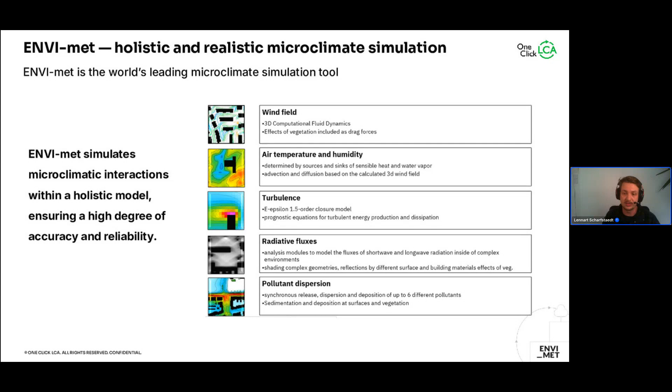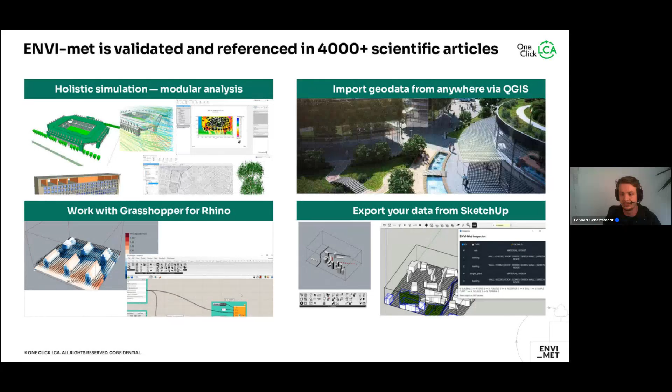These plugins, if you already know how to work with QGIS, Rhino, or SketchUp, are very handy, as you do not have to model areas, or you do not have to learn a new tool. Basically, you can just import your model, run a simulation with a few clicks, and then you get your data and you're set. Okay. That's it about ENVI-met. I hope it was clear what ENVI-met is.

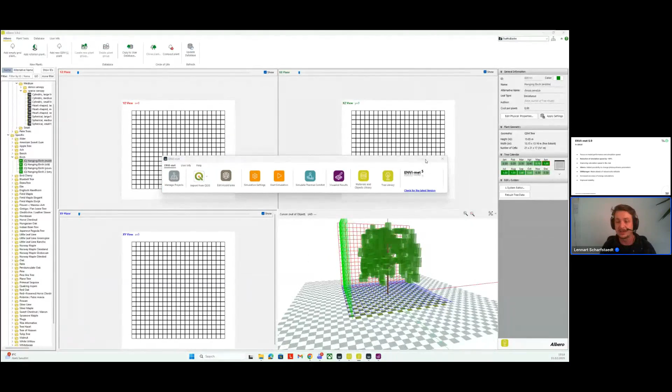Let's open Albero. For everyone that is new to ENVI-met, Albero is the tool where we manage our tree database. We offer a wide range of different trees here, of different morphology, different species. And what we have now added in the physical properties is this section here, the advanced plant physiology, where you can basically change these values depending on your needs.

If you are not familiar with this stuff and you don't really need to go into depth about this stuff, then don't touch it. It's especially for our scientific community, maybe biologists, landscape architects that really need to work with this data or want to work with this data, then you are now able to do that if you like.

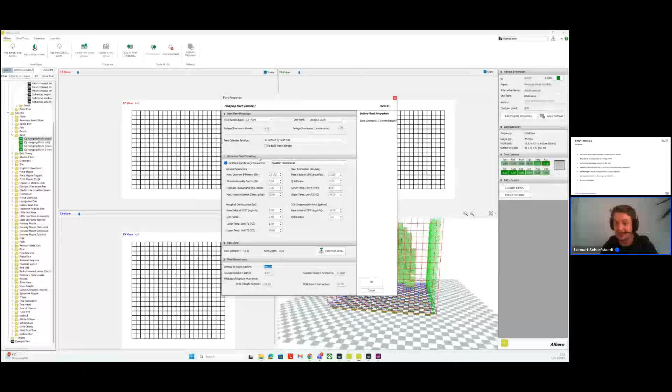And then I have also on the list the DB Manager. Basically, we made the albedo of natural soils editable. Before that wasn't really the case. Now it is. We can also have a quick look at that in a second. This is our DB Manager. This is where we manage all of the different objects, so building materials, different soil and surface materials, and also a couple plants as well, like grass and hedges and such. And now for the soils, usually the albedo values were at 0.

This is because the albedo of a soil is also dependent on the soil humidity content. And before this update, ENVI-met has calculated that for you during the simulation. Now, as it was requested, we have changed it to be editable. So you can now just create a user database or project database item and change the albedo value how you did it before with all the other parameters.

If you do not change it and leave it at 0, ENVI-met will still calculate the albedo for you depending on the soil humidity content, but you now have the option to change the albedo if you like to do that.

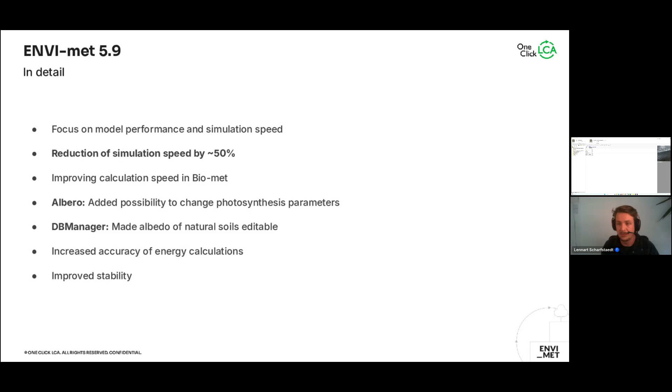I just wanted to present the results from our comparisons regarding the simulation time. I said around 50% is the improvement in the simulation time. And basically, we, of course, have run tests. We've run tests of different model sizes, 20 by 20 grids, 60 by 60 grids, and 200 by 200 grids.

And as you can see here in this 20 by 20 grid simulation, we went from a simulation that took around 37 minutes; in the new version it took around 21, 22 minutes. The 60 by 60 scenario took 7.85 hours, and then in the 5.9 version, only 2.5 hours.

So even a 68% improvement in the simulation time. And the larger model, which I think is the most realistic, if you conduct a climate study in a city district, 200 by 200 grids, we went from 52.1 hours to around 31.5 hours, so 39% improvement here in the simulation time. This is, of course, data that we collected.

Feel free to download version 5.9 and run your own tests, run your own simulations, and share your findings. We are always interested in that, of course, and hope that you appreciate the considerable improvement regarding the simulation speed.

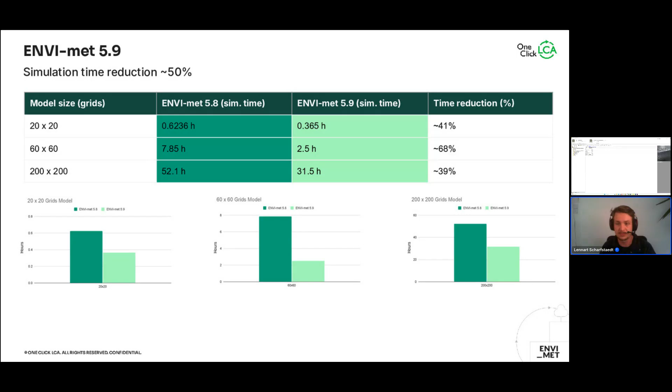All right. Now we've talked about version 5.9. What is coming now is also relevant for 5.8, the single module simulation, and then also the reporting. Let's first have a look at the single module simulation.

This basically allows you to run isolated simulations for solar access and wind flow, and these simulations, not being holistic simulations, then just take a couple of minutes instead of hours, which is, I think, pretty good if you only need a wind assessment, for example, or just want to know the solar access, the sun hours of different surfaces.

And this is now the ENVI-met Central. You can access the Central if you go to the headquarter and press on Manage Projects. And then under Simulations, you can see all of the SimX files, the simulation settings files of your project. And then you can here on the right side decide to create a new simulation file.

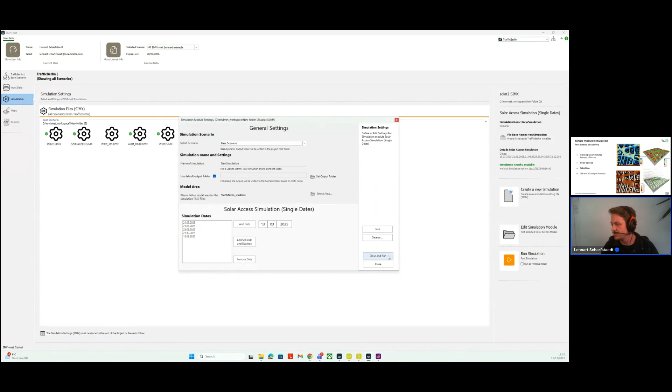Everything that I have to do now is press on Save As. Then I can give it another name. As you can see, I've run a couple simulations already before this webinar. Let's call it Solar 3. And save it, close and run. And now ENVI-met is going to start a solar access simulation for me.

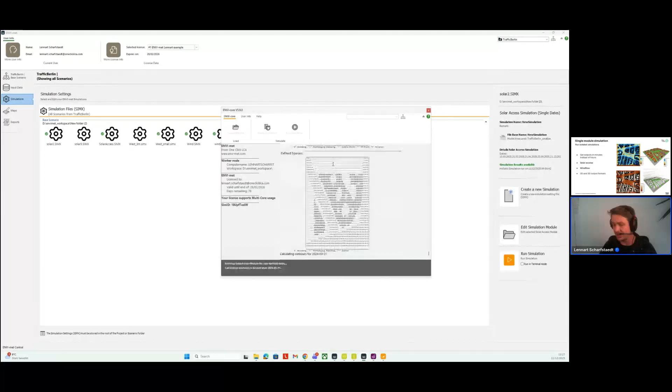You can already see that the ENVI-core has popped up here. It's now working in the background, but it will also pop up in a few seconds or minutes. There it is already, just popped up, and this is now working. It's doing the work for me. I don't have to touch anything anymore, and can just leave it alone.

And the same goes for the wind simulation. You again select to create a new simulation, select the wind simulation here, and again just select the model area file. You can now also select the wind direction if you like. You can select the wind speed, and then also if you want to perform a fast or precise calculation.

And then again, you can press on Save As, you can give it a name, Wind 3, press on Save, and press on Close and Run, and it's going to do my wind calculation. As you can see, the solar access simulation has already finished. The wind calculation will probably take a few more minutes, but we can already have a look maybe at the solar simulation.

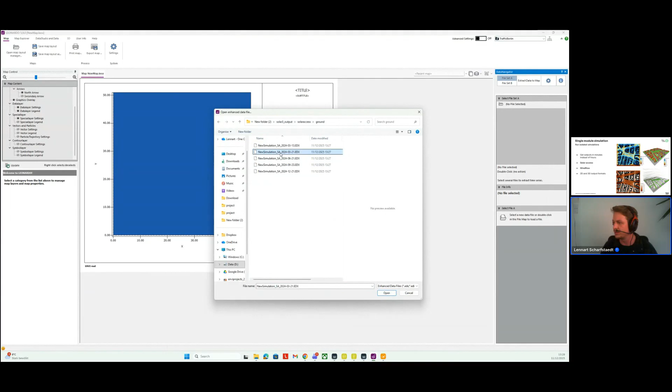For that, I have opened Leonardo, our analysis tool, and here I'm now going to select for my solar calculation the solar access folder in my output folder. As you can see, I can choose between facades and grounds. And let me maybe open the ground here, and 21st of March.

Open it, and as you can see, we have a little bit of data here, sun hours for the terrain level and also the shadow hours for the terrain level. And maybe let's have a look at the sun hours here, extract 2D, and it's a small area, I know. Maybe let's have a look at a more beautiful one. I think I've run a solar access simulation here. Maybe this looks better.

Yeah, this is a part of Berlin. So here you can now see the sun hours at terrain level for the different surfaces, of course, depending on the shadow cover. And the same goes for the wind calculation.

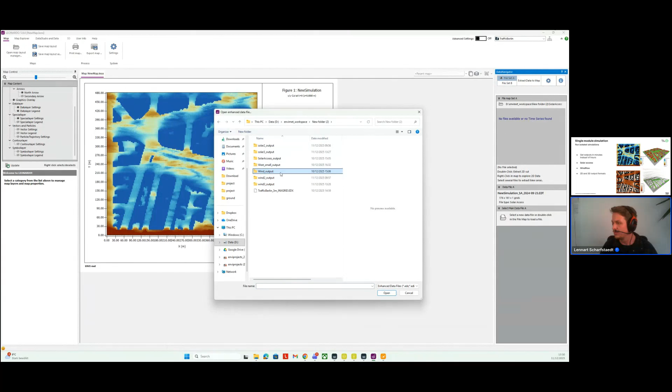Again, I'm selecting an output folder, maybe select this one, put out the data, select an output, output data, and then I can select the height, extract 2D, and now I can see my wind speeds here, for example. I can also activate the vectors.

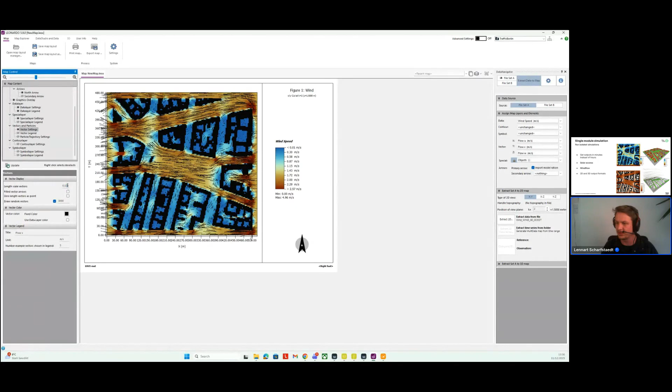Maybe let's make it a little bit better looking. I think 3000 vectors are enough. And also let's make the arrows a little bit more beautiful, a little bit shorter. And as you can see, ENVI-met has now performed a wind calculation for me as well.

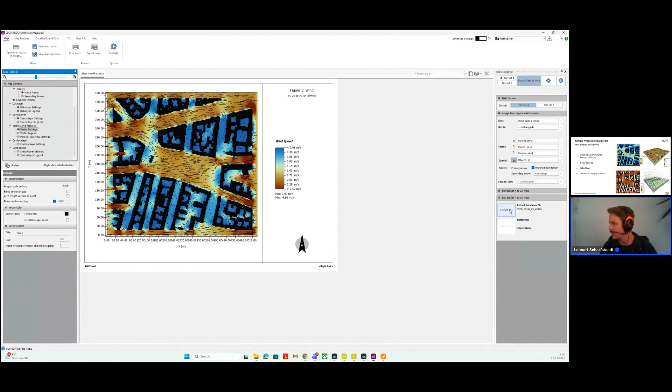I can also, for example, show the wind in 3D and zoom out a little bit. And for example, if I activate the tubular belt settings, you may know these tubes here. I can also navigate with my mouse. You can see that ENVI-met has performed a wind flow analysis for me.

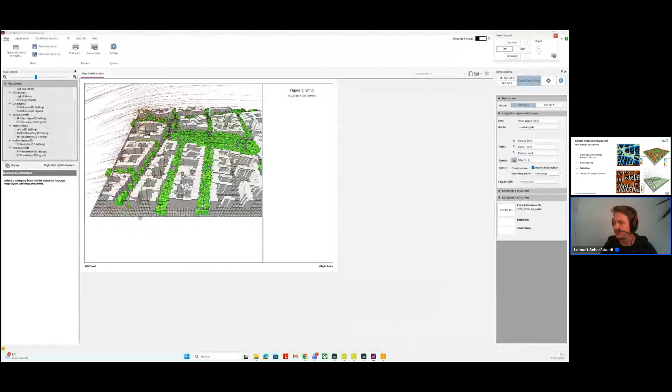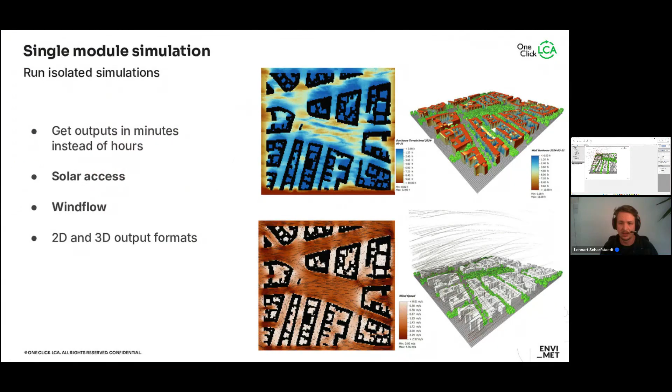And the wind is hitting objects and then realigning. All right, so that's it about the solar access and the wind calculation. Let's jump to the reporting, which is also something we have added with version 5.8.

This is a first version of an automated reporting tool. It basically allows you to upload your data to our online reporting tool, so you can basically use it in the web browser. You can also there visualize your output data, and if you like, generate editable reports from your simulation results. And you already know the drill. Let's have a look at it.

For that, again, I'm going into the ENVI-met Central. And here I can see all of my output data in a list. These are the single module outputs. I cannot create a report of those, but I need to run a holistic simulation. And the whole step basically is I select my output folder, I click on upload report data, and then I can open my reports in the web.

For this webinar, because it takes a little bit of time, I've already uploaded the data. So I'll just click here and open my reports, or my project, my output data. And let's maybe have a look at this project here in Berlin. And as you can see, it is automatically opening my simulation data.

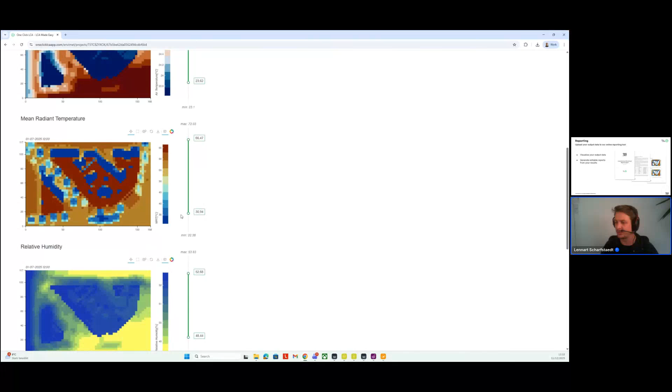We have picked a few variables or parameters like PET, the mean radiant temperature, wind speed, air temperature, and so on and so on. And here I can do basic visualization, tweaking a little bit at the legend. So feel free to play around with this a little bit. And you can also, of course, download a picture of the output map.

And now for me to create a report, I go to the top right corner here, where I can select a report type. So an atmospheric report. This is for air temperature and wind speed, for example. I can do a bioclimatic report for the thermal comfort indices. And I can also do a comprehensive report that contains all of this data.

So let's pick a comprehensive report and download it. And it's giving out a Word file.

Sorry, my voice is going down.

And this is now a Word file that ENVI-met has generated for me. And it's already formatted. It's got a table of contents. We've added different explanations here. For example, general stuff about climate adaptive planning, but then also the bioclimatic analysis of the thermal comfort indices, for example. And then also stuff like the simulation settings, which are of course important.